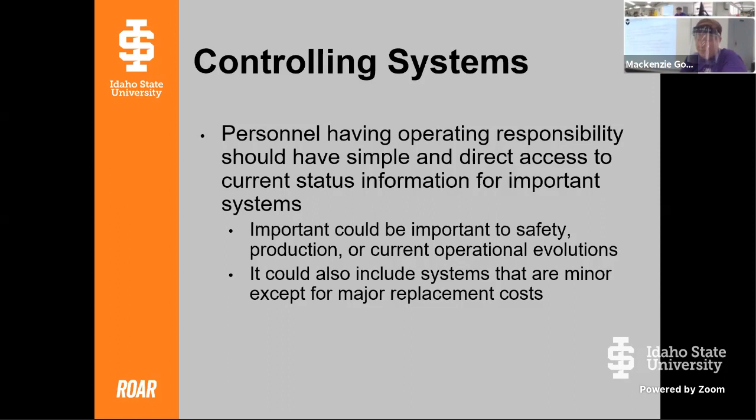So in meeting this regulatory requirement, this standard, we have to implement a status control program. Effective control of equipment and systems requires clear lines of responsibility and authority. This is where we get the fact that we have to designate a cognizant system engineer, okay? During the operation of any facility, process, or project, there must be one individual with whom resides the responsibility for operational control and authority for changes in status of equipment and systems.

So when we're talking about actually using the equipment, you as the operator are the one person who can do these things. The engineer can't come and operate your system. This is you. The engineer's authority is going to be different, and they're going to be the only person that gets to authorize changing that system, making replacements, doing certain substitutions for maintenance, things like that. But when it comes to operation, this is your authority. The engineer doesn't come in and actually turn the valves or push the buttons. You do. And you do that understanding what that system is, what that change is supposed to do, how you're supposed to authorize it, how you're supposed to report on it, and then how you're supposed to proceed afterwards, right?

Usually, in order to give someone in management the actual responsibility, there's going to be a shift or operations supervisor, and then they will designate to you what specific tasks on what specific systems you're going to have responsibility and authority for. So you won't walk in as an operator and have responsibility for every single system, but the shift supervisor is going to decide what work package, what systems, and what operations are going to be yours on that shift.

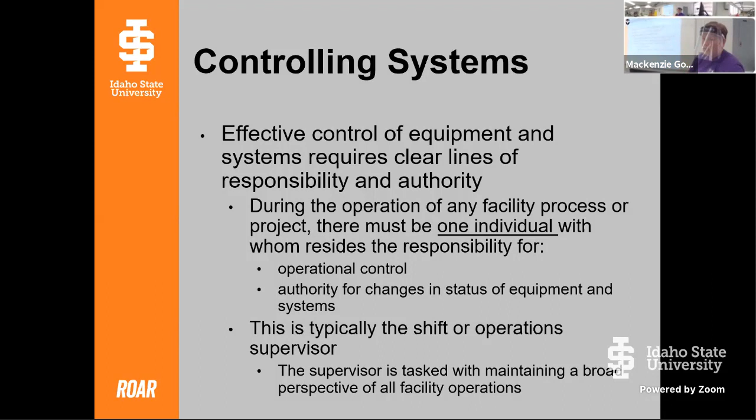It also requires coordinated operations and maintenance activities. So even though as operators you may not necessarily be the maintenance tech, sometimes you will perform tasks very like that. It can depend.

Equipment deficiencies must be promptly identified for correction in the appropriate system. Once you as an operator identify that, you have to turn it over to the maintenance group for them to review it, schedule the maintenance, determine the post-maintenance testing that's necessary, determine what operator involvement is required. Those maintenance technicians and maintenance managers, that's their function. Once you identify it, they schedule it. They determine how much of a priority it is, if it's on an important system or a safety system, they get all that worked out.

But you have to communicate that to the maintenance group. All maintenance activities, post-maintenance testing, restoration, alignment after maintenance - even though the maintenance group is going to perform this work, they can't go do that to any system without the operations group's authorization. So that operations supervisor, before anybody gets to go manipulate a system, even for maintenance, that operations manager has to approve that work being done at that time on that system.

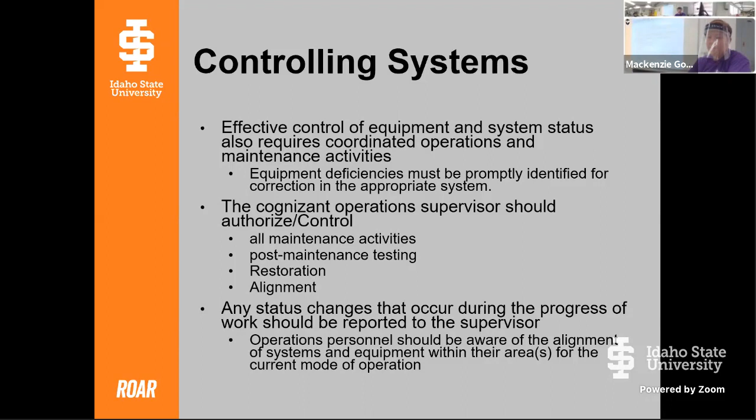You should understand how alignment changes based on modes of operation. Sometimes pumps and valves will be open or closed based on what you're trying to accomplish. So you need to understand how these scenarios play into your actual system so that when an abnormal or emergency condition arises, you have the knowledge of exactly how that system is.

You have confidence that your status information is correct, that it's been put back in its correct mode, or you've been notified of the deviation, so that all of your operational decisions can be based on current knowledge of system status. This is exactly what caused Three Mile Island to have a meltdown.

The operators assumed one thing was happening when it was not. They based all of their decisions on the assumption that the piece of equipment they thought was reading a certain way was, when actually they were getting a bad reading. And if they had bothered to check the other parameters, they would have known that. But they didn't. They checked one point of information and made all of their decisions based on that bad information.

In order for you to have consistent, correct, current information, there's going to be a program of documenting, updating, controlling, and verifying all of your system statuses. And it has to be implemented throughout the entire facility. It can't just be some systems. It has to be all of them.

Now, some of these status programs need to be more rigorous. Our pressure vessel, even though it's very important to safety, does its lineup change? No, it's a giant steel tank and it remains a giant steel tank. So we don't need to verify every hour that we have the information on our lineup correct. Maybe every 6 months, we just go walk around and make sure we haven't discovered some corrosion or stress cracking or connectors that are starting to degrade. We're not going to walk that every day, definitely not hourly or shiftly or something more frequent. A giant steel tank is assumed to still be a giant steel tank.

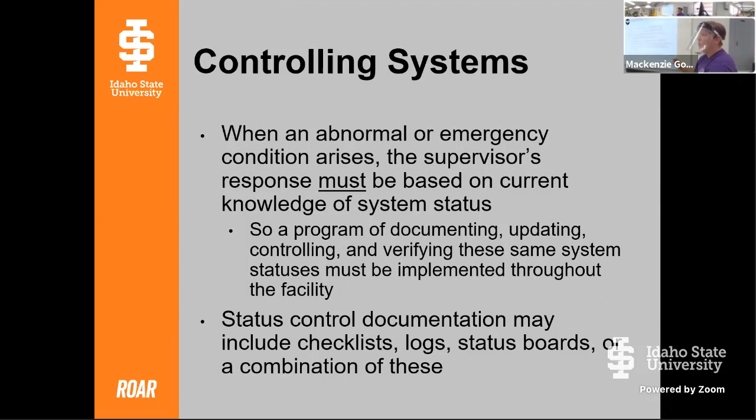Which means then there's a tremendous amount of procedure associated with updating your status board. Not just any person can go in and change the status board in your control room. Technicians who are coming to report something like that tell an operator, and they can update their status board. Or you have a procedure that says only the person who just signed off the maintenance can actually go change that status board. It's going to be controlled in some manner, very specific.

So what do we use these for? Checklists are going to be appropriate control documents for establishing correct component position and using them as guides when placing systems and equipment into service or other modes. So essentially, your startup procedure at your reactor is going to have a checklist that you go through and you verify each one of the parameters that you need to.

Once that's signed off, you take that to your operations supervisor or your shift supervisor. Then they say, yes, you checked everything, yes, it's in the parameter, sign it off, okay, you can go ahead and start. You're going to have a pre-startup checklist that you're going to do every time.

Status boards are usually going to contain some sort of graphic or schematic representation, or a list of system components that you need to be able to quick reference.

It may be things that when they're tagged out of service and repaired over a shift or outage periodicity, you're going to put that system status there, and you want all of them back in operational mode before the end of the outage. You might have different alignments for different modes, and you need to indicate what mode that system is in. ATR has 4 lobes that can all have different experiments and slightly different parameters, meaning you can have pumps in one part of the core running at a different speed than pumps for the other part. You can have control rods in banks at different levels with different power in different quadrants, depending on what experiment they want to do. You're less likely to do that at a commercial reactor because they want to be uniformly at full power as much as possible, and they're really good at it. Nuclear energy has a 94% capacity factor, meaning 94% of the time when we need nuclear power, those generators are running. You don't do this as much with commercial power, but in experimental reactor operations, you'll do this a lot.

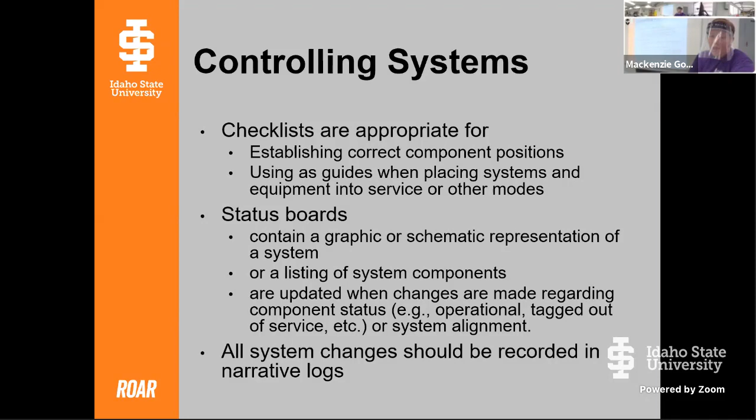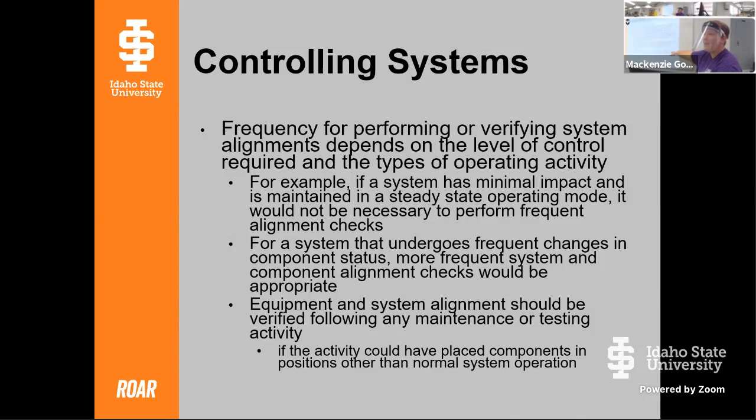Frequency for performing or verifying system alignment depends on the level of control required. If the system has minimal impact and is maintained in a steady state, you're not going to check it very frequently. A system that undergoes frequent changes is going to have more frequent checks. Regardless of how often you normally check it, most equipment requires, at the very least, that you check it after maintenance or testing activities, because typically we take that equipment out of its normal operating status to do a repair or test, so we have to verify we put it back how we need it before we rely on it again. Usually at a minimum, you're going to need to do a system alignment after maintenance.

So it should flow obvious that before we put equipment back in service or require it as an operator, we're going to need some sort of control to actually authorize the work to be done. Work authorization deals with a myriad of safety issues - it's going to be given credit for dealing with RAD, lockout, tagout, confined space, heights, and whatever other industrial or human safety issue might be involved in that work. But it's also going to prevent anyone from making an unauthorized change in your facility, because you can't go perform work without a work authorization.

This is why it's so important as an operator that you don't have the attitude, 'I am aware of how to do this job, I don't really need the procedure.' The procedure isn't about your ability to do the actual skill or job. You are going to be trained professionals who will spend a lot of time having mentors show you what to do on the job - you're going to be very good at it. The procedure is part of the work authorization that ensures the entire facility is complying with the system control program.

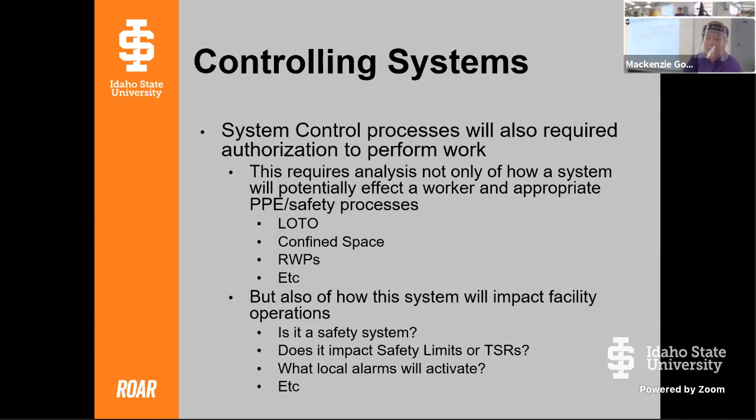Except when you have a procedure that tells you you're going to receive one, because you're doing a maintenance test on your radiation detector and you're going to hold a source right next to it. Of course you'll get a radiation alarm - you're checking to make sure that you do. So you can then announce to everyone around you, 'don't respond to this alarm,' and perform that test without responding. You always need to make sure you understand these impacts in every procedure and work evolution you do. So we talked about how each one of those is going to be part of our work authorization.

Everybody in the whole crew that touches that system has to buy into this process. Not only does engineering have to make sure they understand the design of the interconnecting systems, and that they've given you a good procedure to actually test the requirements, but also that you know how to line it up so you don't cause an unexpected consequence in a system further down the line. Maintenance has to know that they can't go touch a system until operations tells them they can.

The shift supervisor has to have this big picture of everyone who's working at one time on a facility. Operators have to understand why they're using a work authorization, what maintenance has just done to their system, and what engineering requires the specifications that system stays in are. And then, of course, you're going to have various other technical experts.

You're going to have criticality safety subject matter experts. You're going to have chemical safety experts. You're going to have electricians and all sorts of specific experts who may be required to get involved, as well as your safety authority, your internal regulator that's part of the company, and then your external regulator, NRC or DOE.

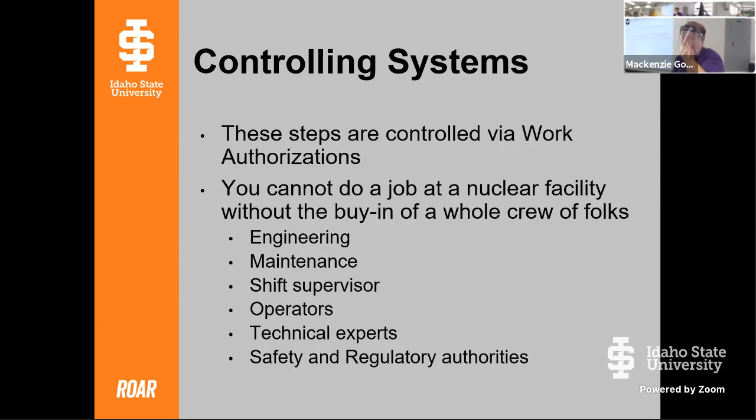So everyone has to buy into this, okay? So that entire work package, that authorization, is going to put together all of the approvals, the behind-the-scenes data, and then that's going to feed into the actual instructions for what you're going to do.

We're going to go a little bit more in depth specifically on procedures in this class. You're going to actually follow some. My plan is to have you follow a reactor startup procedure and start up the simulator reactor and go through that step by step, following each piece of the procedure. But right now, just understand the reason that at the far end of this process you follow a procedure is that, as you trace this process all the way back, it is to give you a safely operating facility and current correct information on those system statuses.

If you don't have an accurate picture of the current facility status, none of your decisions as an operator will be based on truth. And then you're just guessing, right? We don't want that with our reactors.

So, operator responsibilities. Were you asking a question, Jack? It has your little square highlighted. Nope, I don't know why that is. Okay, we'll ignore it.

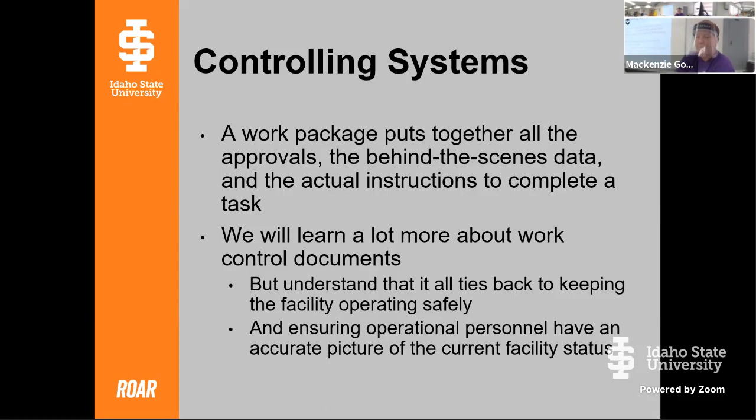And then what's CSE stand for again? Cognizant system engineer. It also stands for a few other things—crit safety engineer, and there's a few others. I was a crit safety engineer and a cognizant system engineer, I was both. So be aware it stands for multiple things, but when we're talking about system control, it's the cognizant system engineer.

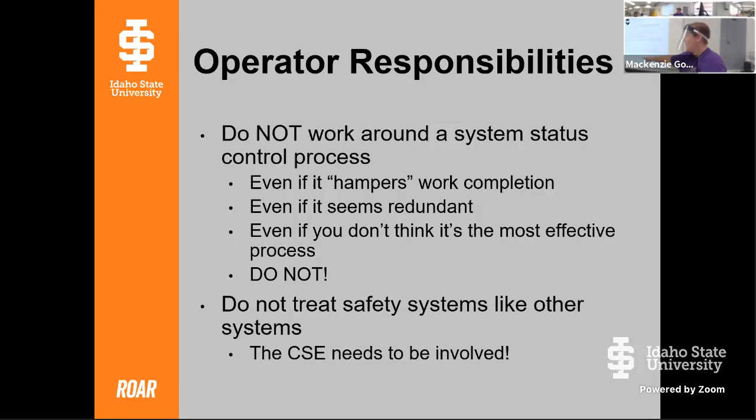And this is just kind of the 'did you make the right choice in life' moment. If you're going to be frustrated about this process, this isn't the job for you, because this is how we do business as nuclear professionals. They're not just paperwork—they are a value-added process because we have to make sure that we get that current, accurate information. And this is the best way we've been able to implement to do that across entire facilities, across multiple work groups.

Reliably and effectively. Your reading in that black and yellow book talks about the fact that 30% of nuclear incidents occur during maintenance activities, where only about 2% occur during operational activities. And that's because of exactly this system being challenged. Multiple groups are looking at multiple systems, they're doing their own work, they're going out and changing status. And if they don't all communicate to each other and across the systems well, you're going to have an incident—something that doesn't get done right, or something that's a precursor to an accident. Something doesn't get shut off before work is done.

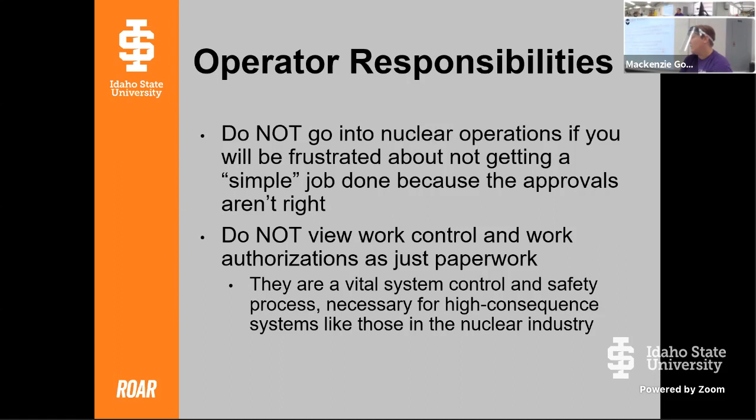Maintenance is going to be the time that this structure struggles, which is why you have to view this as an important system you have to buy into, not just paperwork that interferes with your ability to get your work done efficiently. Does that make sense, Joe?

I have a couple questions. Would you call the Davis-Besse incident something that happened during maintenance, or during operations, or neither? I would probably call that one neither. There is some maintenance issue—in whatever they were doing with their water chemistry, when they needed to be checking that, they were out of the specification that was going to help inhibit that pitting corrosion. So they missed some maintenance stuff. As that corrosion was going on, there should have been indications as they were operating—their pH should have been changing, they should have been seeing corrosion products.

The demineralizer and deionizer would have been working harder, right? Even though it's pitting corrosion and not as broad as general corrosion, there were going to be some indicators, and they probably were there, and they were covered up. They would have been small, because one of the big concerns with pitting corrosion is you don't get as many indicators as general corrosion, right? It's in that little tiny hole. But there would have been still a little bit of information that showed, well, my deionizer system is burning up faster, my zeolite beads need to be regenerated more often. So there's something going on, right?

They also, I believe, falsified inspections. And so now we've gone over into a whole other scenario, right? That is such a cultural problem with how they were operating that facility that there was an engineer who was willing to essentially lie about his or her control of that system. So that's now not operations' fault or maintenance's fault. This plant management completely stopped prioritizing safety over production, right? So I would call that, because it wasn't caught when it should have been, a complete safety culture breakdown.